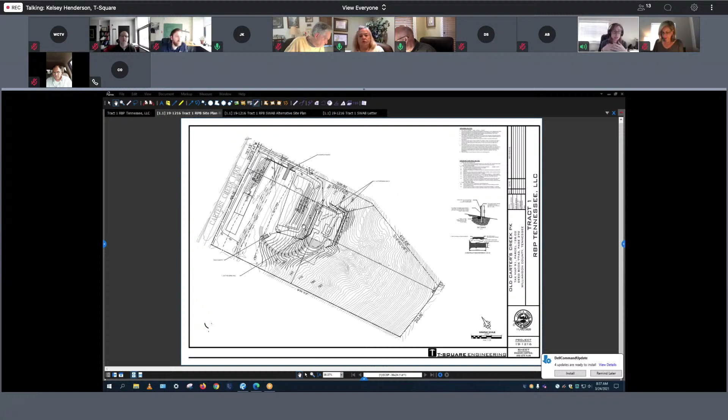There's already a bridge and an approved entry onto Carter's Creek Pike at the northern corner of the property, and we're seeking to use that without installing another bridge or disturbing the creek any further. The proposed use of the existing drive, as mentioned, is about 300 feet in length, and we would only be extending it to exit the WNA by about 45 feet.

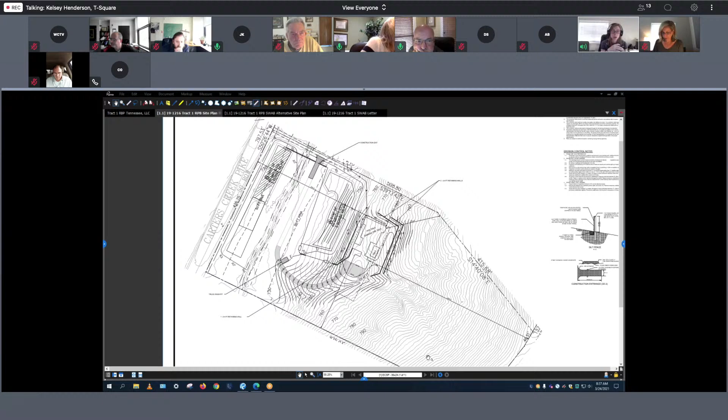It's very flat in that area, so we would be avoiding any sort of sheet flow coming from that drive more towards the creek. We're just very limited in our maneuverability, because between the 50-foot WNA and the septic areas as they are recorded, there's only about 15 feet, and you're not allowed to cut per septic regulations within 15 feet of the septic areas. So we're unable to pull that existing drive out.

The other option, which would be to not install another bridge, but to go up that northern edge of the property line to access the proposed building area for the house, enters 30 to 35% slopes, and it's just unreasonable for our use.

Any questions from the panel? Yes, I have a question.

Is this going to be paved? Yes, sir. And the existing driveway as it exists now and is shown on these photographs is what's there right now. The new one's going to be just a paved version of what's there now. Yes, sir, that is correct. It'll be exactly what is there now, which is already compacted and was gravelled previously. It'll just be paved, and then about 45 feet to pull it out of that WNA to continue the drive up to the house, proposed residence.

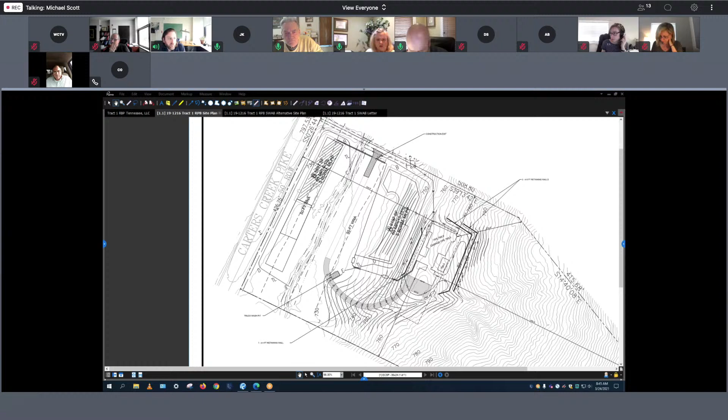If the reg states it's treated water, you can have a point discharge at 25 feet. If not, it has to be outside of the waterway natural area. I don't know that this would be treated water. But you can review that as part of this waiver.

Yeah, it looks like this is Floyd. It looks like they've got a curtain drain coming down and going under the drive. It's allowable for curtain drains to discharge all the way to the creek with the assumption that it's clean groundwater being intercepted and taken around the septic system. I don't know if they can tie into that curtain drain for purposes of getting the intercepted water to the ditch as well, because the ditch between the driveway and the septic area should be clean water, except for maybe what's coming from the house.

Is there further review on your part with the final plan, or is this it in terms of the drainage? No, this would pretty much be it. The person reviewing the single lots would be looking to make sure they have the appropriate controls specified, but there wouldn't be any other recommendations other than what's in front of you.

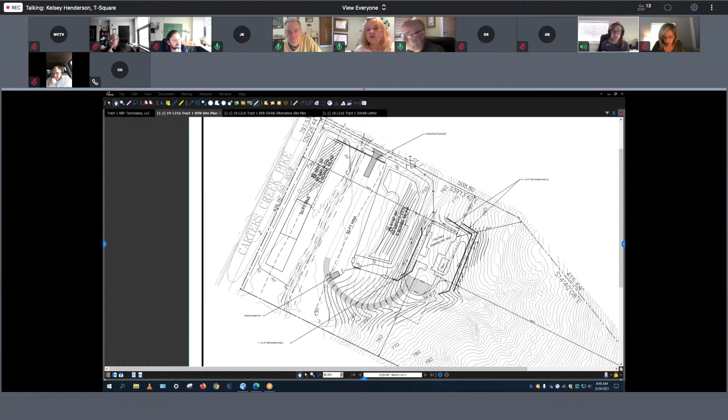If I may, additionally, as we mentioned the curtain drain earlier, the curtain drain is specifically in place to catch and redirect any sheet flow coming down the hill around the residence. So really anything intercepted by a proposed ditch or which would sheet flow across the drive will be just what lands on the septic areas itself and sheet flows across them. So the volume of stormwater we're talking about is pretty minimal.

Any other concerns about that? One thing I've always wondered about curtain drains, typically they show a detail where the trench is backfilled all the way to the surface with granular material or gravel, so surface water can quickly get into the subsurface and into the curtain drain. But in reality, I think what actually happens is they put topsoil over it and sod it, so it's not letting surface water in as much as it's letting groundwater in.

Is that accurate, Kelsey? Yes, sir. It is primarily a subsurface diversion method, but it is useful for some surface flow as well. Especially since so much is coming off of that hill, it starts to flatten out in that area immediately, so a lot of that should become subsurface. Where does that curtain drain daylight since it's so flat down there?

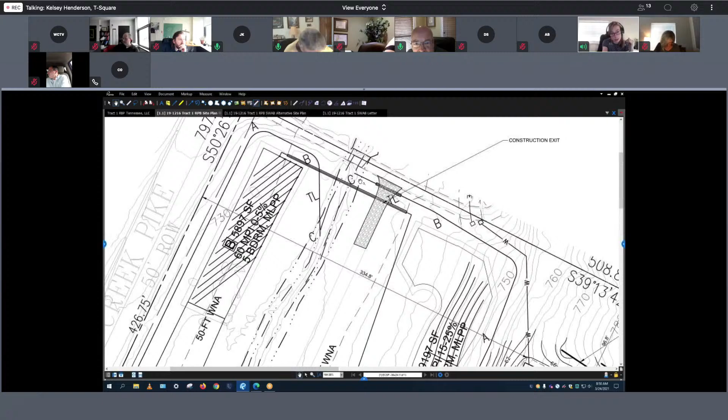If you can see the letters on the diagram pulled up currently, most of the flow should be caught on the northern side of the septic area and diverted north underneath the very beginning of the proposed drive. If you can see letters A to B to C - you have the gravel from A to B, and then the tile line from B on takes it across that proposed drive down to the creek directly. Oh, I got you. Okay, wasn't clear to me that was the curtain drain. Thank you.

Any other concerns, questions, comments on this? Yes, this is Brad Hoot.

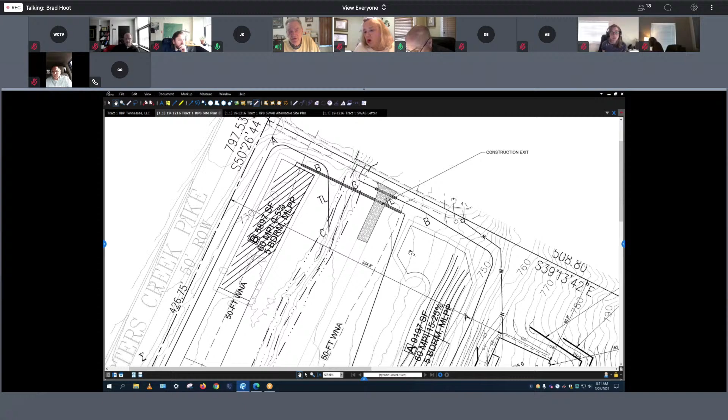Kelsey, how long will it take to do this in terms of any preparation for paving until the paving is done? You've mentioned the paving will be flush. Secondly, what time of year do you think you might be doing this? And let me comment, and you can correct me, but it looks like if this were paved and flush and well graded, it would actually be an improvement over flow coming down and scouring out what's there now. Would you care to comment on those three things?

First, yes, sir, I would agree that having a paved flush area would be an improvement for encouraging sheet flow in the area. As for the actual timeline and time of year for installation, I would have to defer to the contractor. He's not present on this call, but I would assume his timeline would be pretty short for a job like this.

And can you do it at a time when it's good to grow grass, and maybe when heavy rainfalls are not so prominent? And will someone from your organization be watching over this to keep it on track? Yes, sir, absolutely, to all of that.

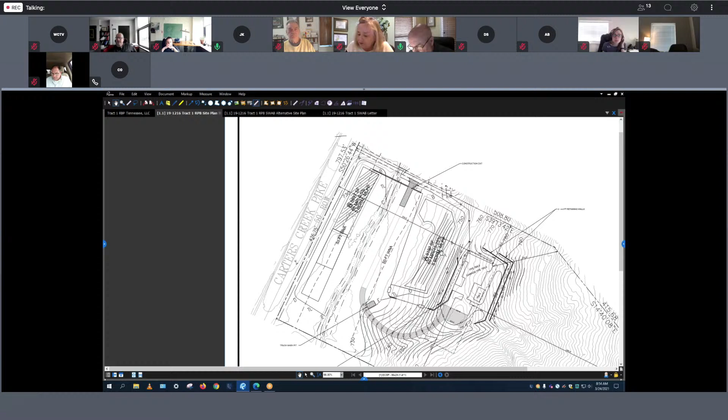If somebody's talking, I can't hear them. Yeah, Andy, we're not getting you right now.

Kelsey, this is Floyd. If Tim is in the room, I think we had talked with Tim earlier on this project, and I seem to remember something mentioned about kind of an enhancement along that stream bank, or a proposal for some landscaping. Do you know if that's gone anywhere?

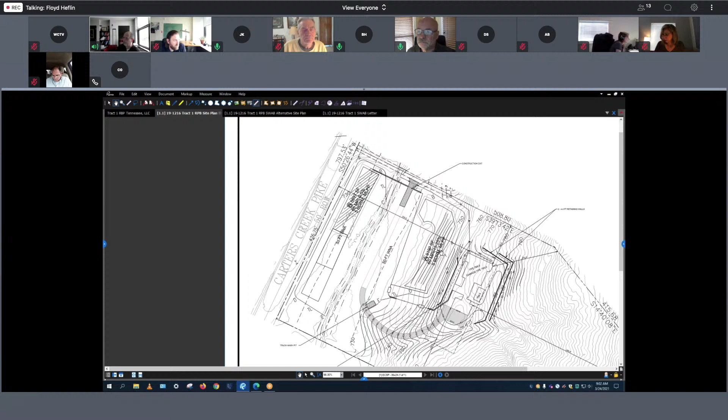Well, this is Mr. Kenny. It looked like the grass there is a Kentucky fescue grass, which is a deep-rooted grass that will hold the dirt real good, whereas some of the other grasses are real shallow-rooted. Your Kentucky fescue will go three to four feet deep on some of the roots.

Has anybody else got any questions for the applicant, or do I hear a motion on what we've got? I move, this is Brad, I move to approve the application. Do I hear a second on that? Second. All right, all in favor? Floyd, can you call the roll?

John Kenny, in favor? Brad Hoot, yes. Betsy Hester, yes. Robbie Adams, yes. Liz McLaurin, yes. Andy Reese, yes. Motion carried. Did you hear me?